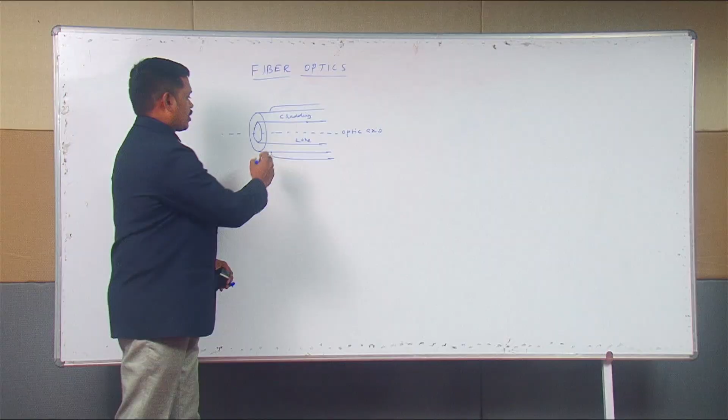The internal portion is called core, then external is cladding, and this is optic axis. Along with this, we have one more layer which is called polyurethane jacket, which can protect the fiber from any damage. Normally, the core material having high refractive index and the cladding material is having low refractive index.

If you send any external light through the fiber, it should obey the total internal reflection condition. So we should understand what is total internal reflection.

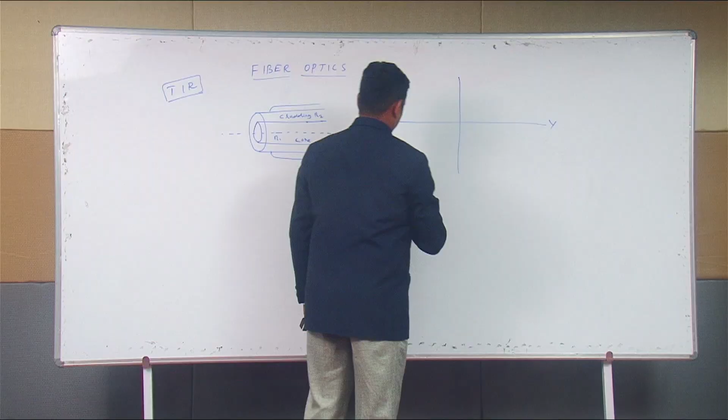For that, if you take two mediums, one is denser medium, another one is rarer medium. Assume this is the plane, the ray of light is going to travel from denser medium to rarer medium. It can undergo refraction in this condition, and this is the normal, and the angle between the incident ray and normal is angle of incident.

Most people have a misconception. They choose the angle between the incident ray and the plane as incident angle. This is a misconception, since this portion is called glancing angle.

Now if you increase the angle of incident, the angle of refraction also increases. Here also we have to measure the angle of refraction from normal to refracted ray. So if I increase the angle of incident, angle of refraction also gradually increases.

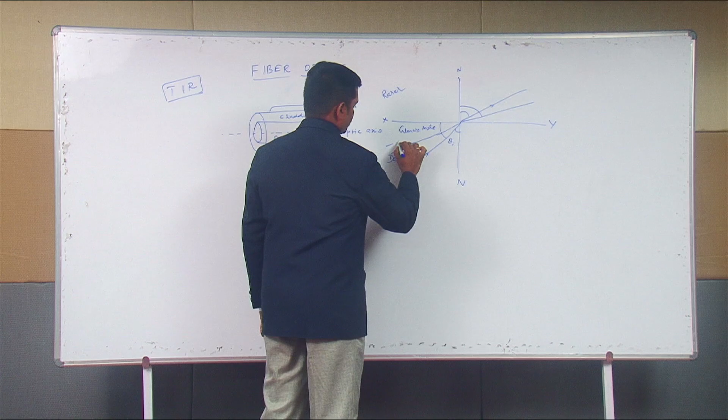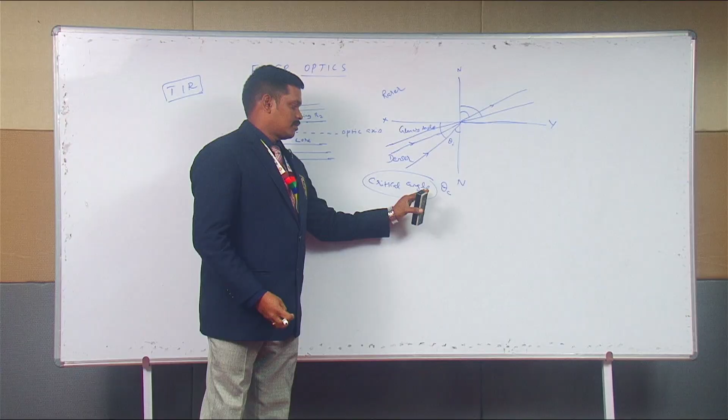Furtherly, if I increase the angle of incident, the angle of refraction becomes 90 degree. That angle is called critical angle. The critical angle plays very important role in the total internal reflection. The exact definition for critical angle is, for a particular angle of incident, angle of refraction is 90 degree. That angle is called critical angle.

Above the critical angle, if the angle of incident is furtherly increased, it gets reflected within the same medium itself, that is denser medium itself. That phenomena is called total internal reflection. So for all fibers, total internal reflection plays very important role in order to enhance the efficiency of output.

In this concern, we can derive the expression for critical angle. So before deriving about this, we can have a recap on laws of reflection as well as laws of refraction.

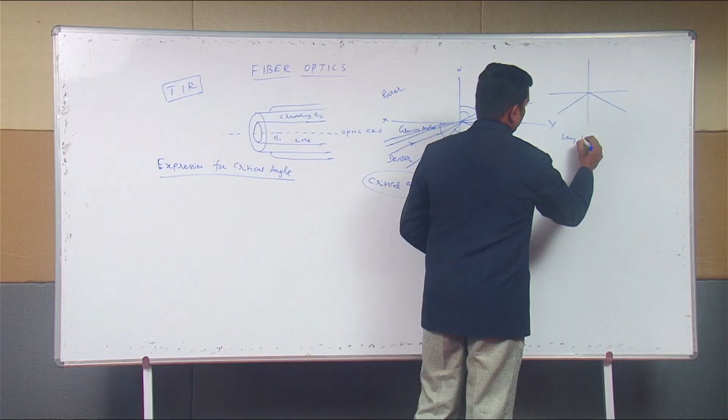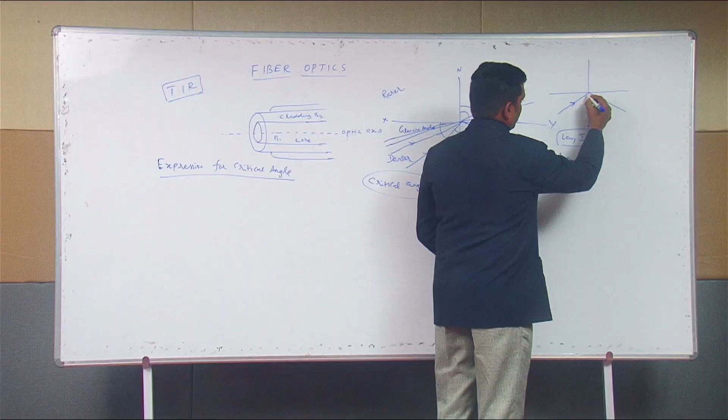For laws of reflection, if you assume the ray of light transfers from one medium, if it gets reflected like this, here law 1 is: the incident ray, reflected ray, and normal, all lie in same plane. The same way, law 2 is the angle of incident is equal to angle of reflection.

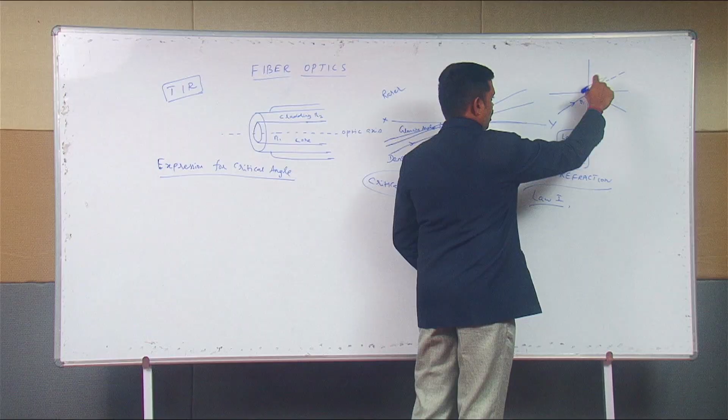Similarly, we can discuss about laws of refraction. Again you can assume the ray of light is going to travel from one medium to another medium, if it is refracted like this, again law 1 is similar to laws of reflection. The incident ray, refracted ray, normal all lie in same plane, whereas law 2 is very important, which is applicable in total internal reflection also. That law is called Snell's law.

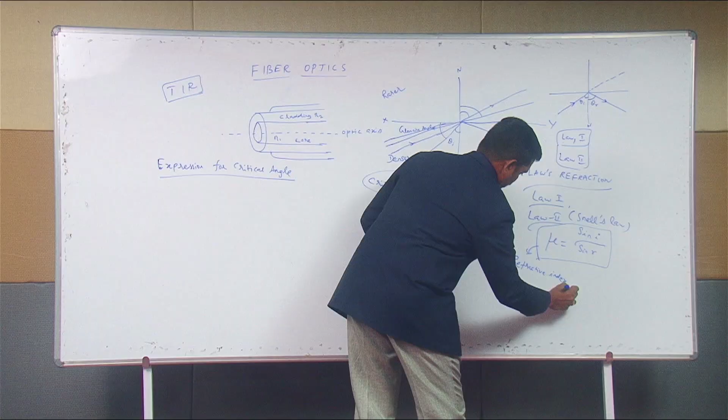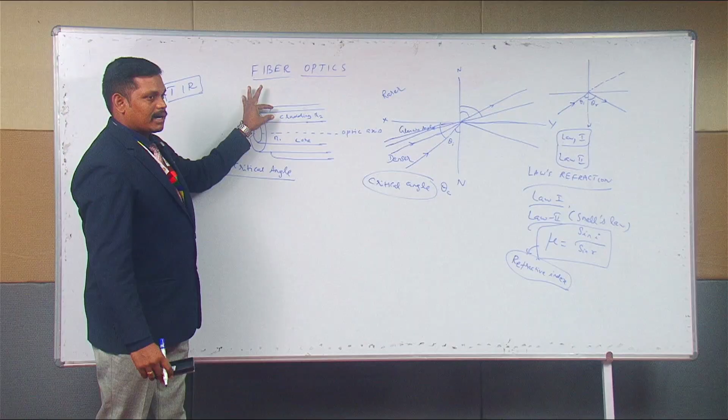According to Snell's law, the ratio of sine of incident angle to sine of refracted angle is constant, and this is called refractive index. That refractive index plays very important role in fiber optics. As we mentioned earlier, the refractive index of core is high and refractive index of cladding is low. Then only it can obey total internal reflection condition.

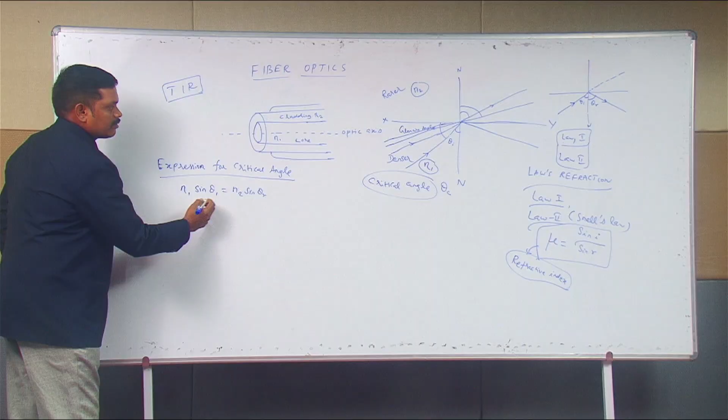Now coming to the expression for critical angle. So according to Snell's law, the refractive index of denser medium is N1, the refractive index of rarer medium is N2, and you can write the equation as N1 sin theta I is equal to N2 sin theta R. From this, sin theta I is equal to N2 by N1 sin theta R.

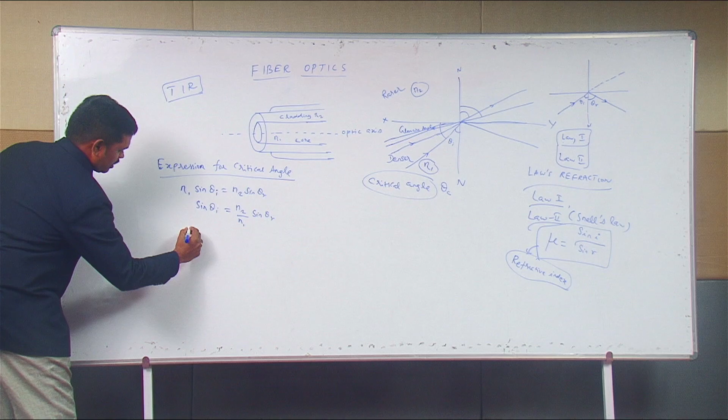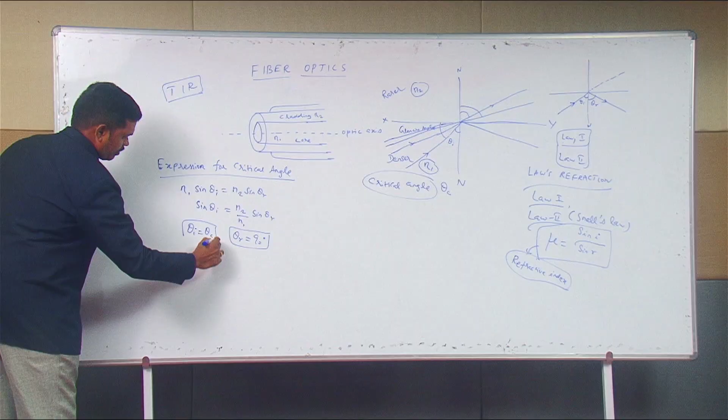As we discussed earlier, for critical angle condition, refraction must be 90 degree. So for 90 degree, it can undergo total internal reflection. So theta I is equal to theta C. In that concern, sin theta C is equal to N2 by N1 sin 90 degree, and we know sin 90 is 1. Then we can have sin theta C is equal to N2 by N1. Theta C is equal to sin inverse N2 by N1. So this is the expression for critical angle.

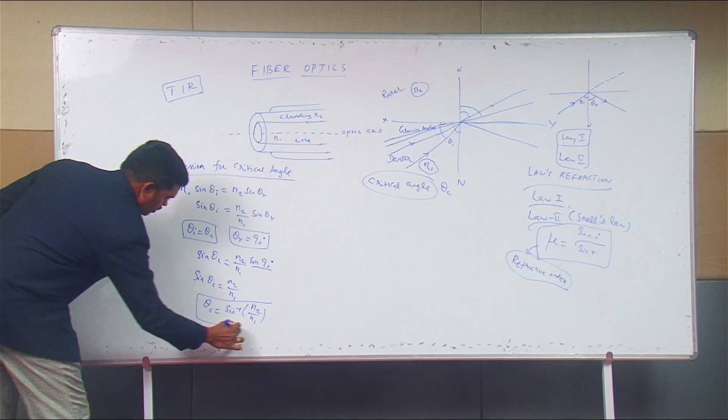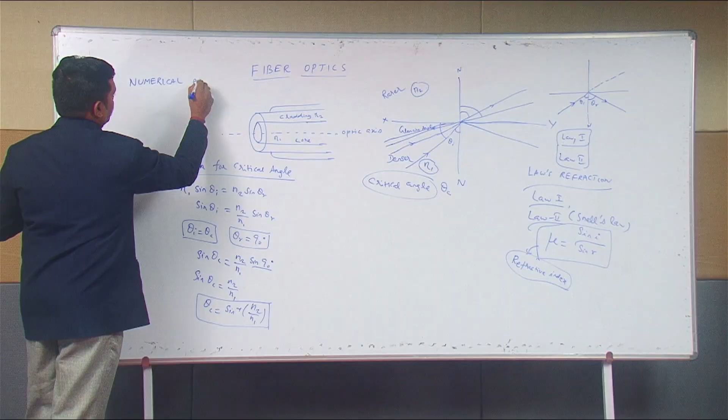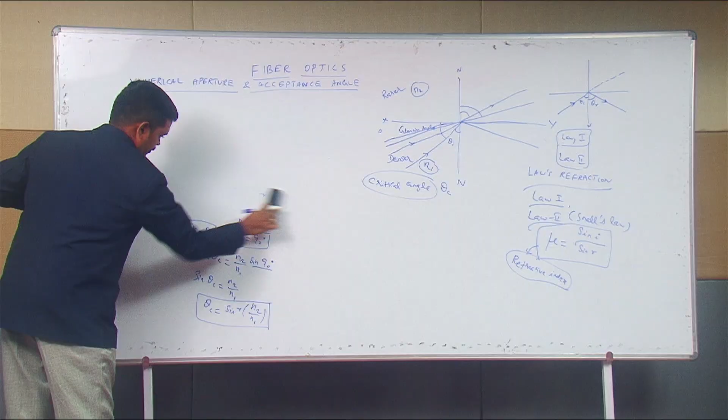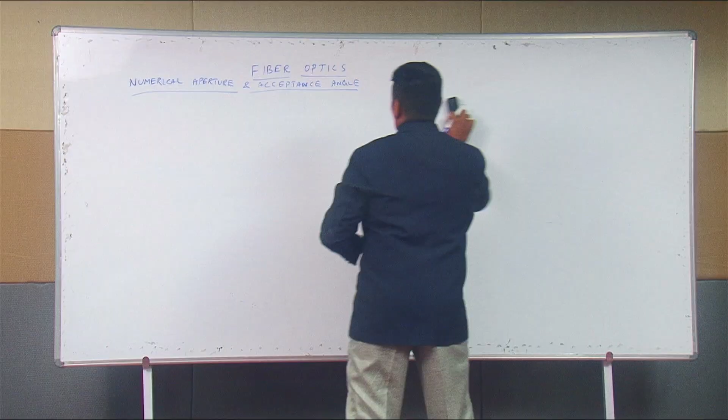And based on this, we can derive the expression for numerical aperture and acceptance angle. In other words, we can say this is the principle of light propagation through fiber. Or we can say principle of light propagation through fiber.

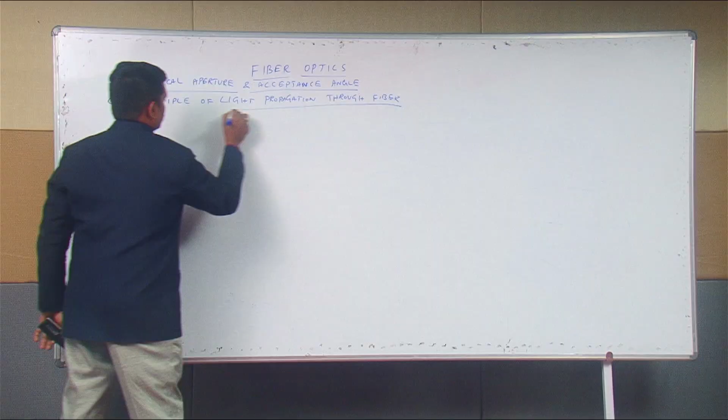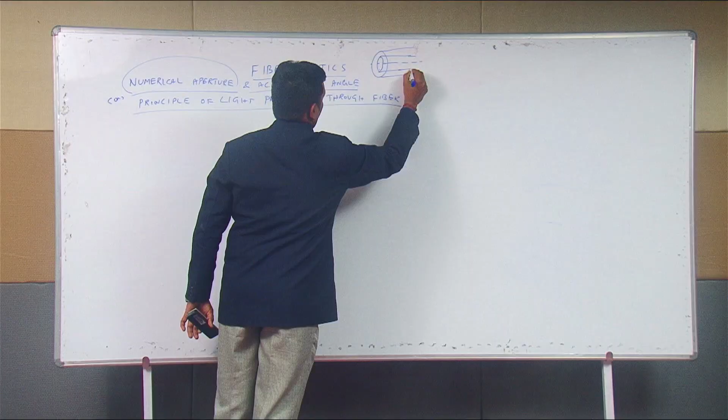So first we should know what is numerical aperture. See, if you take any fiber, the opening portion is called numerical aperture. This portion is called numerical aperture, in which the ray of light can incident so that it can undergo total internal reflection. And acceptance angle is the light entering at one end of the fiber.

If it enters at a particular angle, then only it can undergo total internal reflection. That is called acceptance angle. So in that concern, we have to derive expression for both the numerical aperture and acceptance angle.

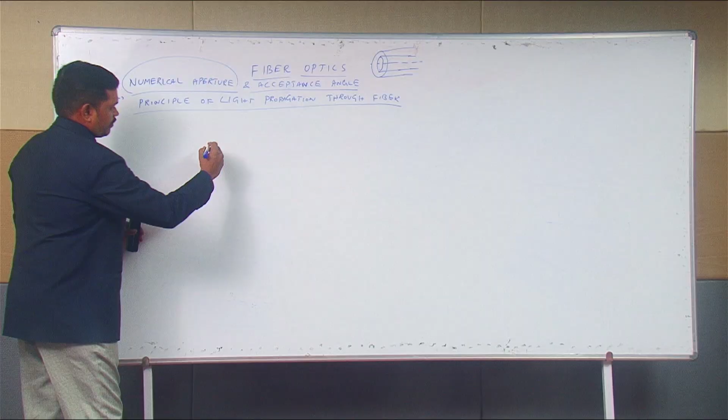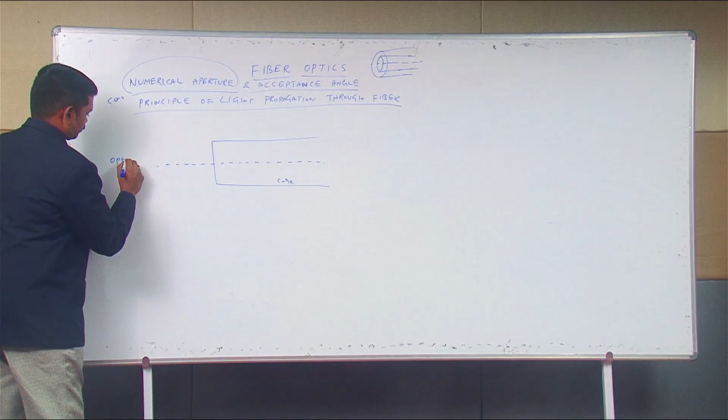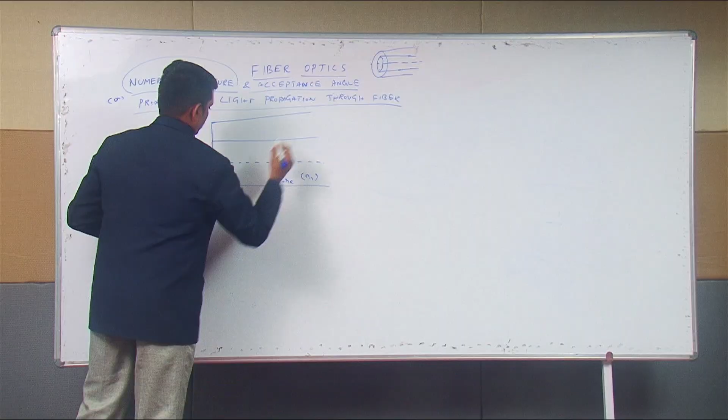For that, we can assume again a fiber. The fiber, this is core portion as we discussed earlier, and this is optic axis, and the core having refractive index N1, and this is cladding. It has refractive index N2.

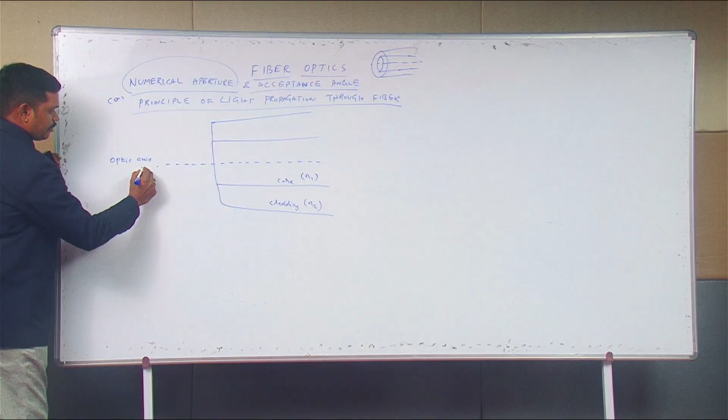Assume that a ray of light is going to incident on one end of the fiber, say that point is O, and the refractive index of surrounding or air is n naught, we can assume.

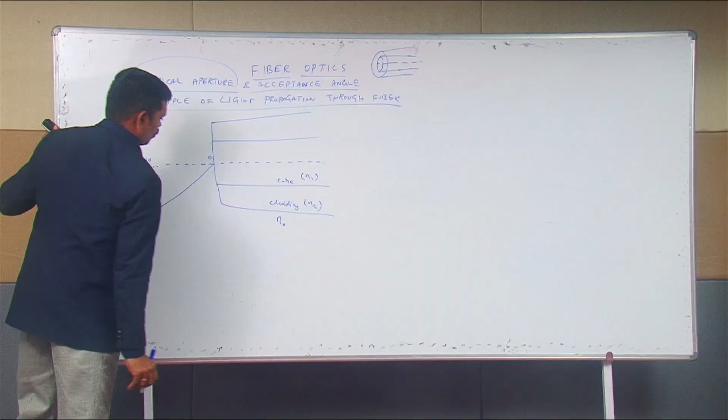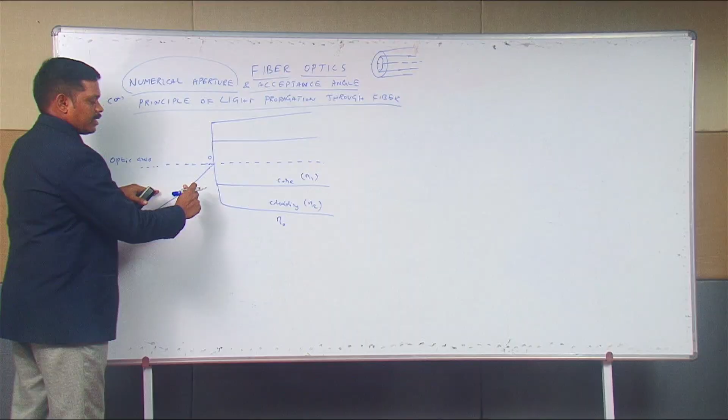So, AO is the incident ray. Then by obeying the total internal reflection condition, the ray can be refracted and it meets point B, in which the angle is 90 degrees, and after that it undergoes total internal reflection condition.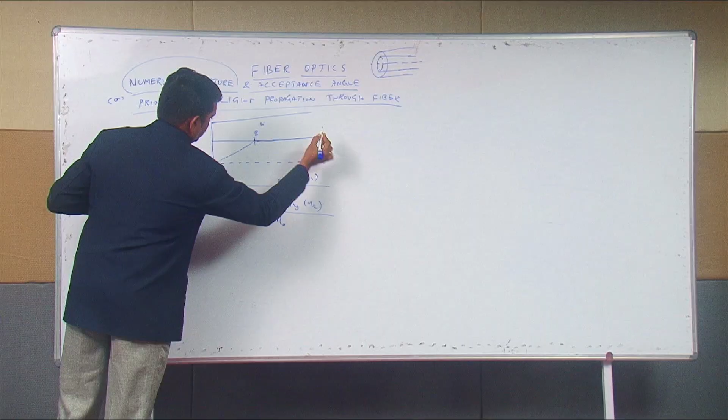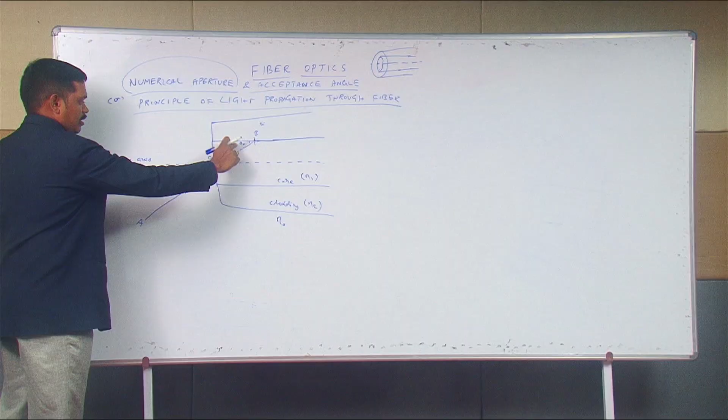And this is the angle of refraction. As we know, alternate angles are equal. In that concern, you can mention this is the refracted angle, and this is also the refracted angle.

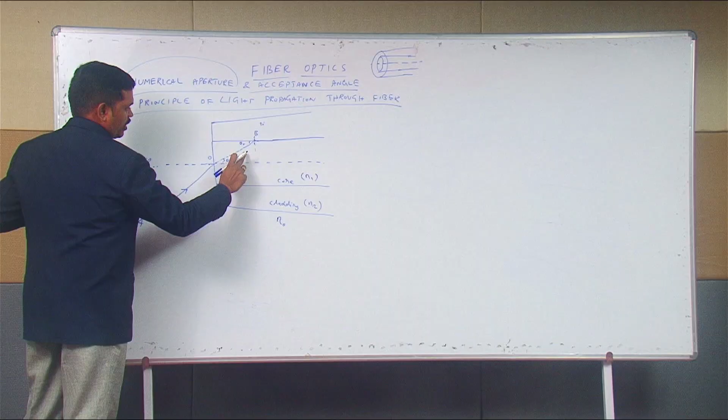In the same way, AO is the incident ray, OB is the refracted ray, but for point B, OB is the incident ray in which the angle of incidence is 90 degrees minus theta R. So, at point B, 90 degrees minus theta is the angle of incidence.

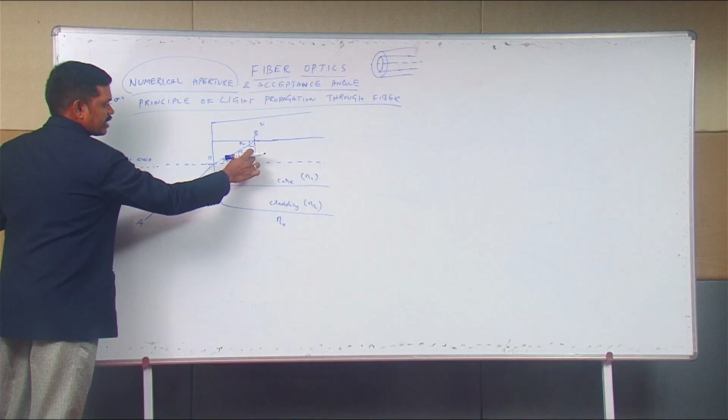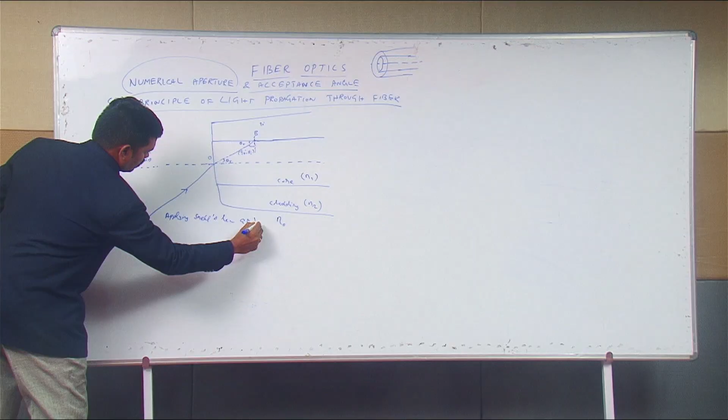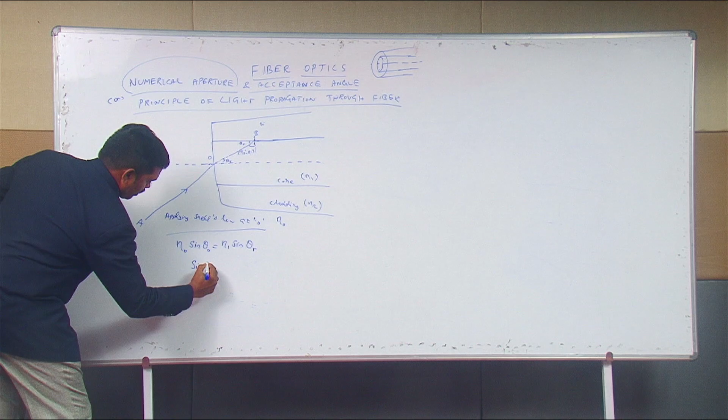Now we can apply Snell's law at O. So applying Snell's law at O, we can write N naught sin theta naught is equal to N1 sin theta R. From this, sin theta O is equal to N1 sin theta R by N naught.

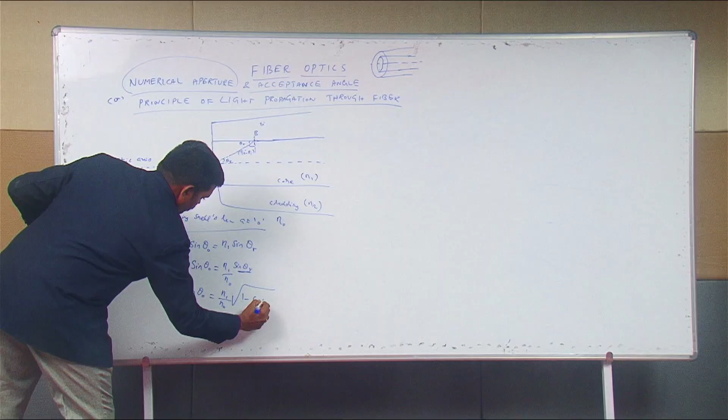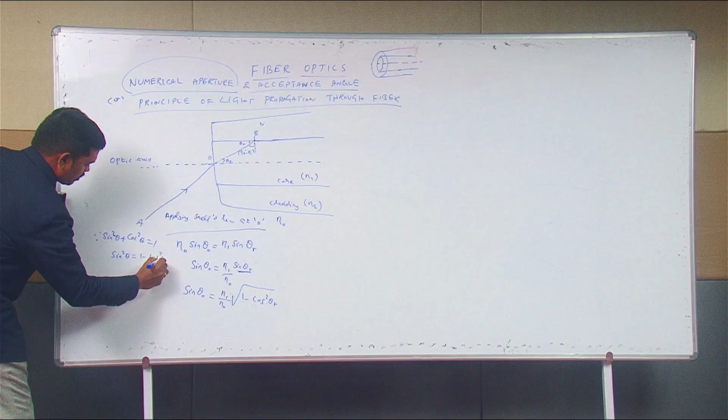You can assume it as O or not, that is up to us. And here, instead of sin theta R, you can write sin theta naught is equal to N1 by N naught, root of 1 minus cos square theta R. Since we know sin square theta plus cos square theta is equal to 1, sin square theta is equal to 1 minus cos square theta. If you need to find sin theta, it is root of 1 minus cos square theta.

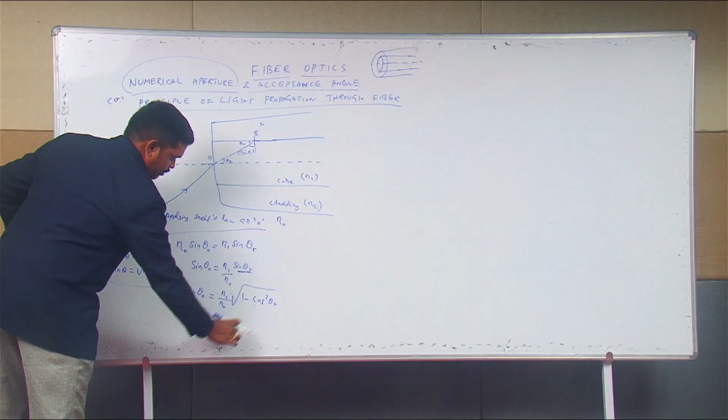So in that concern, instead of sin theta R, we substitute 1 minus cos square theta R. We can assume this is equation 1. In the same way, we can apply Snell's law at point B.

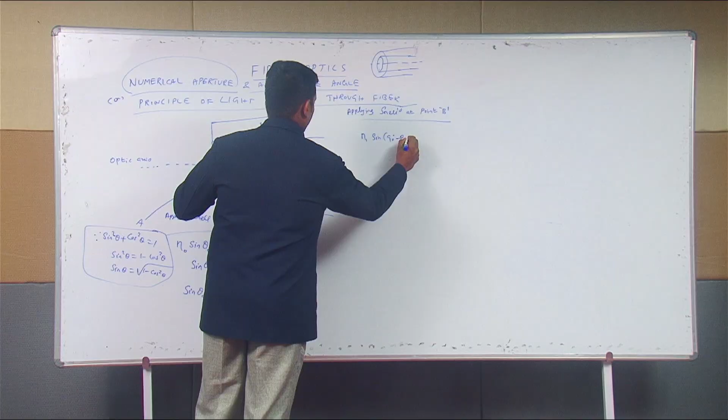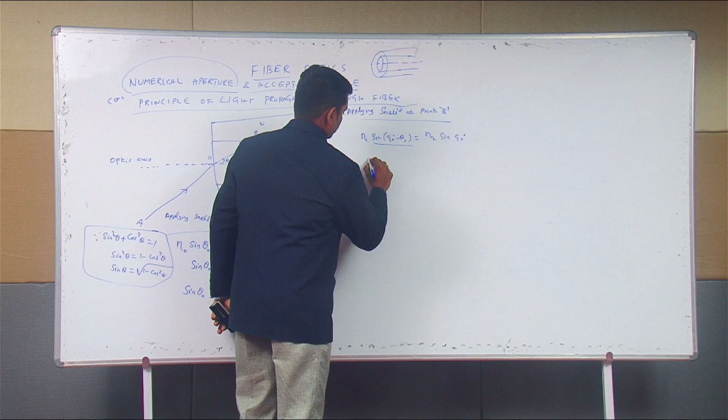And as mentioned earlier, here this is the incident angle. So N1 sin(90 minus theta I) is equal to N2 sin 90 degrees. Since at B the angle is 90 degrees, and we know sin(90 minus theta) is cos, so N1 cos theta I is equal to N2 sin 90.

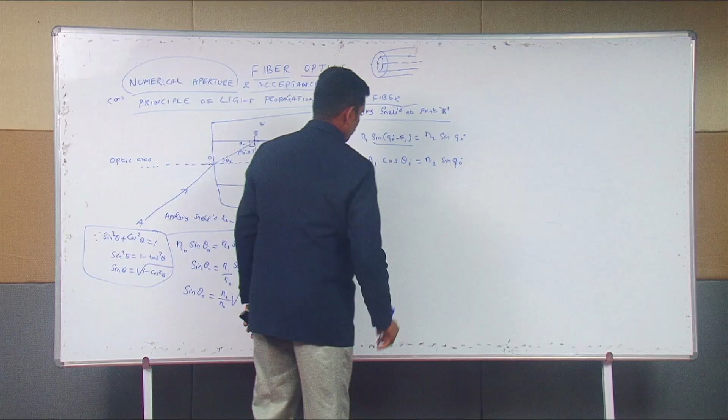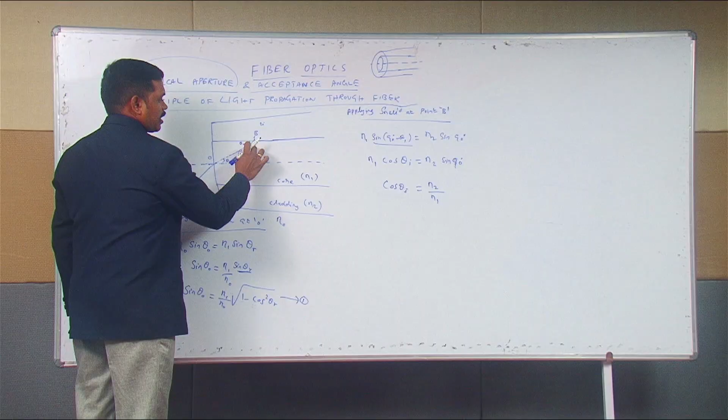From this, cos theta I is equal to N2 by N1, and here this is theta I and this is theta R. Alternate angles are equal, so you can represent this as theta R also.

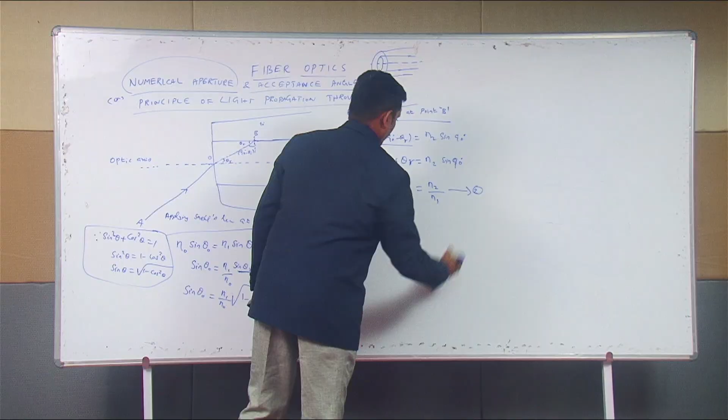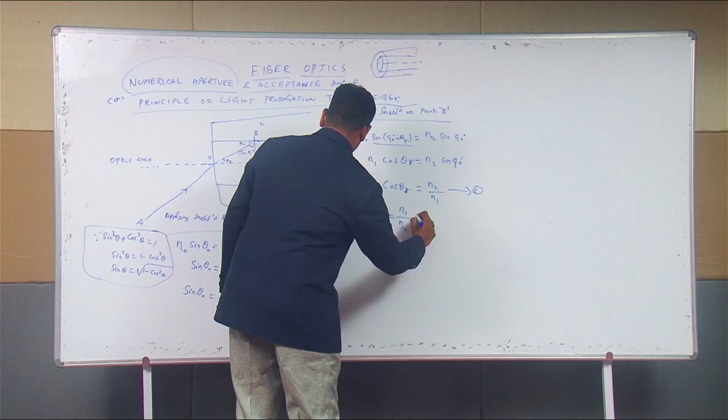This is equation 2. Substituting the value of 2 in 1, we have sin theta naught is equal to N1 by N naught. Instead of cos square theta R, we substitute N2 square by N1 square.

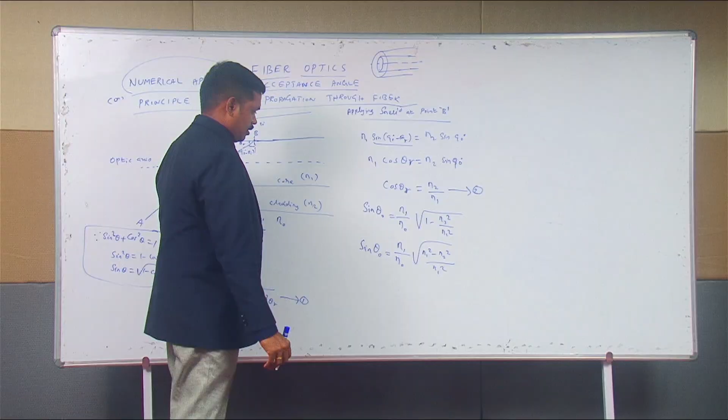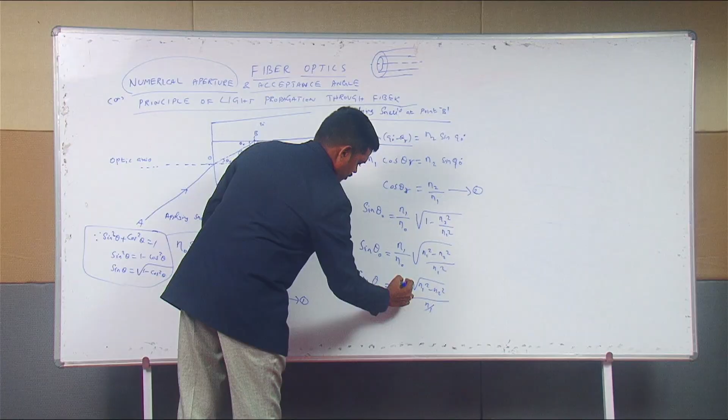So simplifying this, sin theta naught is equal to N1 by N naught, root of N1 square minus N2 square by N1 square. Further simplifying, sin theta naught is equal to N1 by N naught, you can take the root, so you can write this as N1 square, N2 square by N1, and by cancelling this, we have sin theta naught is equal to root of N1 square N2 square by N naught.

From this, theta naught is nothing but the acceptance angle. So theta naught is equal to sin inverse root of N1 square N2 square by N naught. Here N naught is the refractive index of air. For air medium, N naught value is 1. So in that concern, theta naught is equal to sin inverse root of N1 square N2 square.

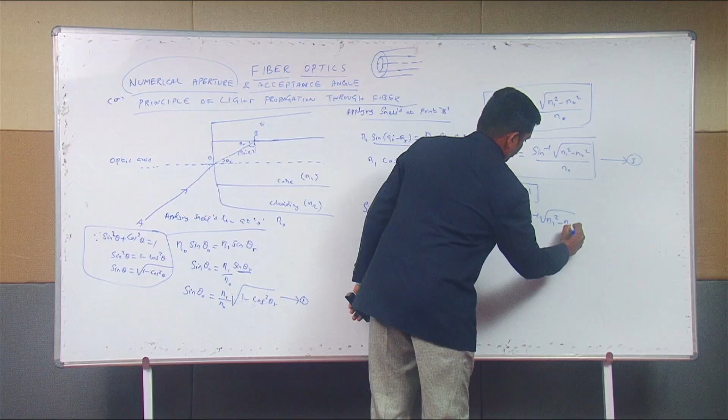So this is the expression for acceptance angle.

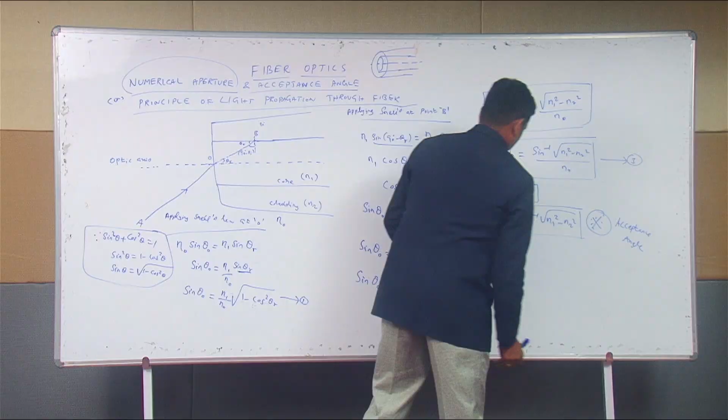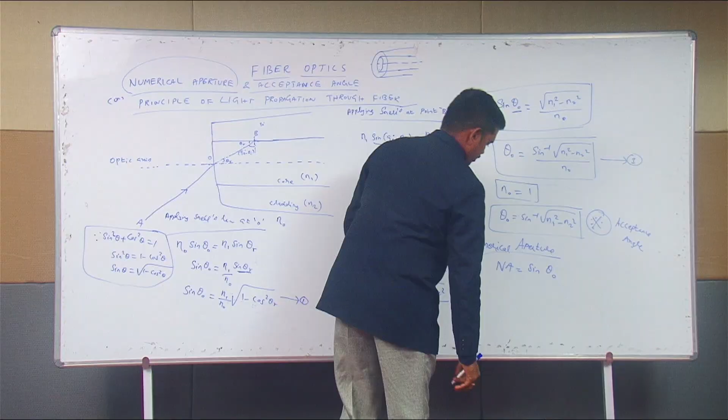Then followed by, we can discuss numerical aperture. Numerical aperture is nothing but the sine of the acceptance angle. In that concern, we can have numerical aperture equal to N1 square N2 square.

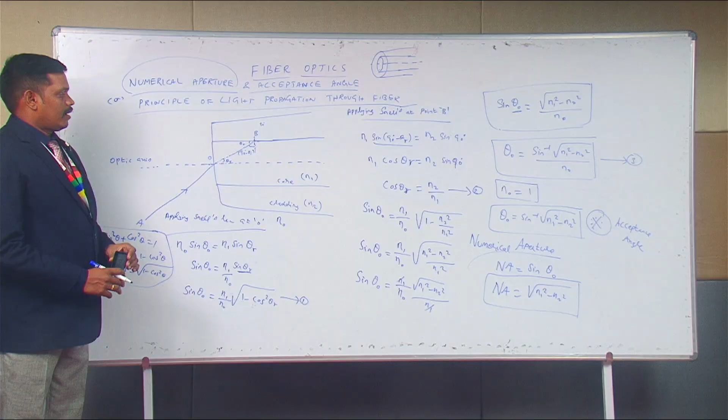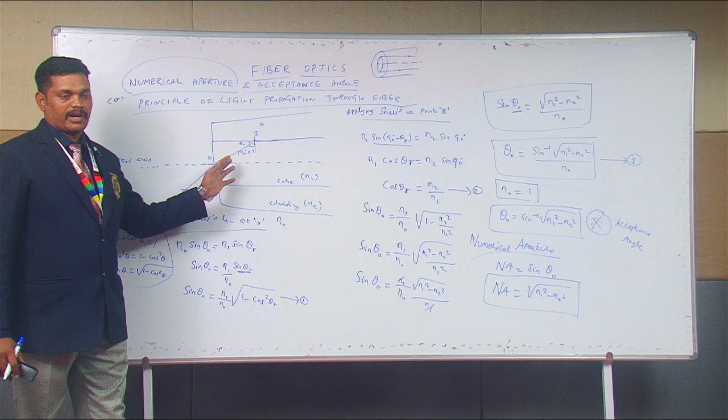So these two are very important to understand any fiber's principle, and based on this we can discuss the losses associated with fibers. So if you are using any fiber, definitely there will be losses, and there are three types of losses.

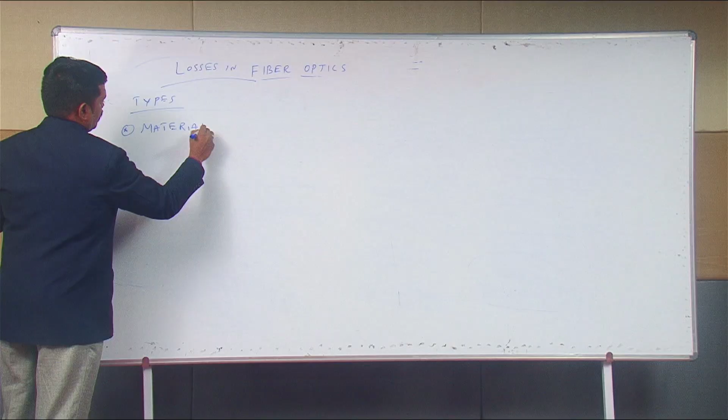So, losses in fibers, the types are material absorption loss, scattering loss, and bending loss.

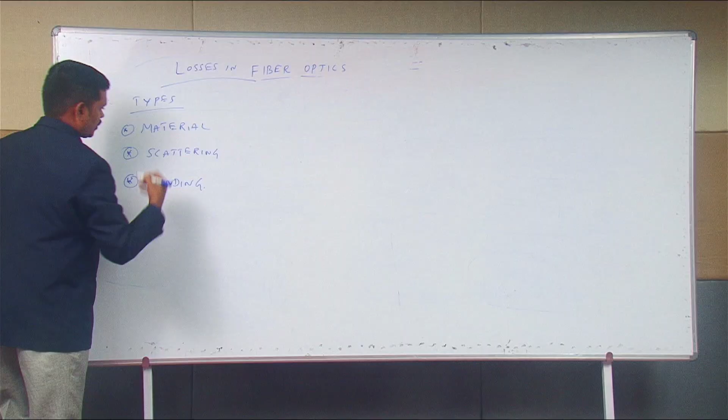The material absorption loss is further classified into three categories based on the material used for manufacturing of fibers: extrinsic absorption, intrinsic absorption, and absorption by atomic defects.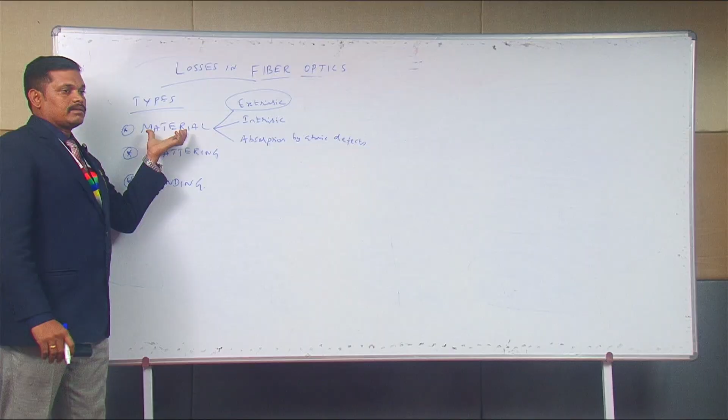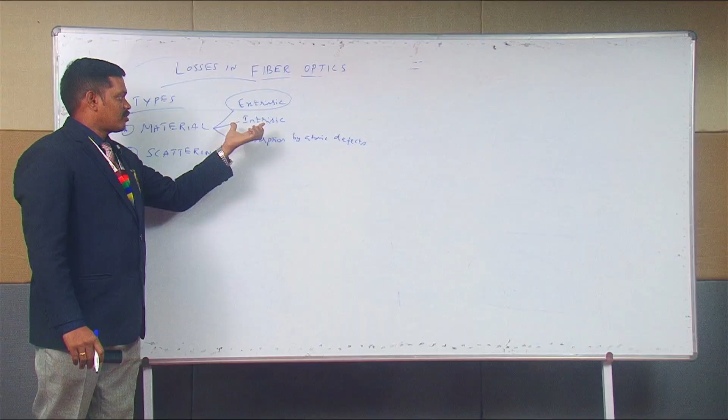So while using the fibers, there is a chance of absorption from extrinsic material, and if it is absorbed, there will be a loss of output. Intrinsic absorption loss takes place during manufacturing itself, or while using, because of continuous usage there is also a chance for intrinsic loss. Absorption by atomic defects also takes place during manufacturing if there are any defects during manufacturing.

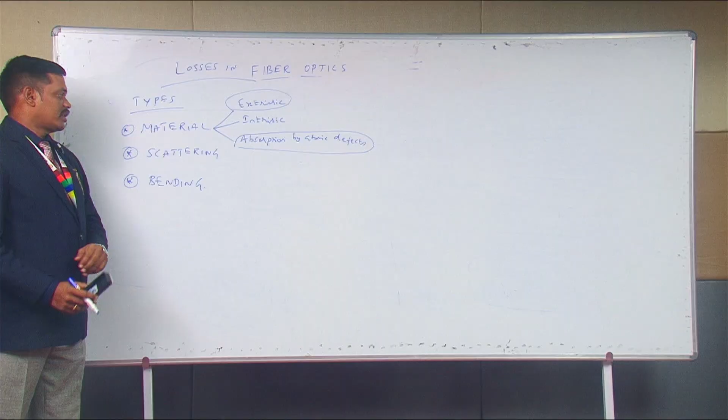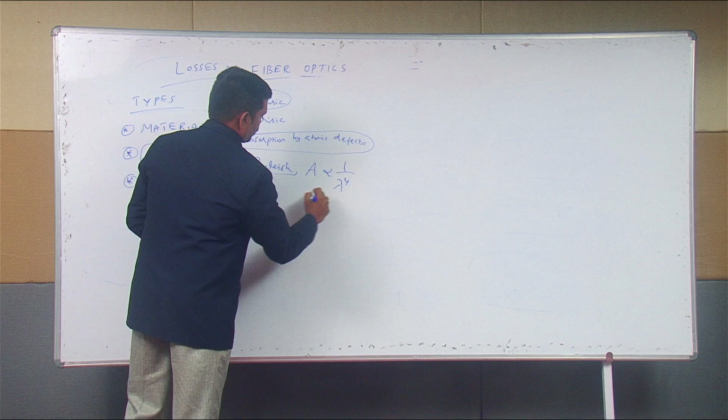The scattering loss takes place because of continuous usage, and it obeys the Rayleigh law. Normally, Rayleigh law states that the amount of scattering is inversely proportional to the fourth power of wavelength. So that is the second type of loss, and the third one is bending loss.

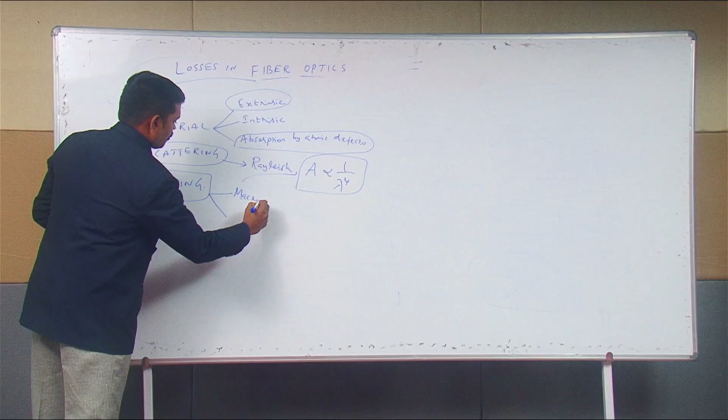It is further classified into two categories, such as macroscopic bending and microscopic bending loss.

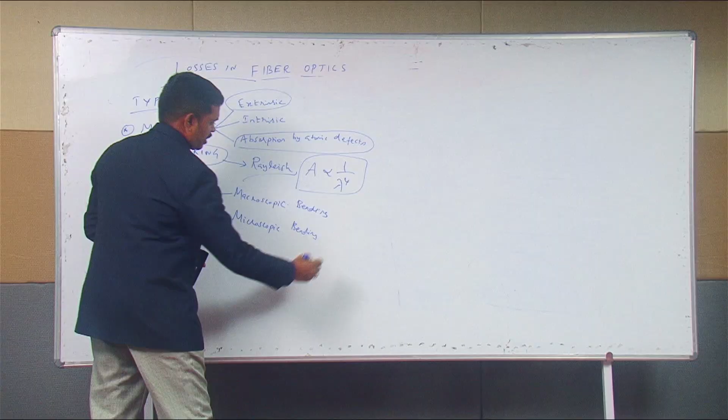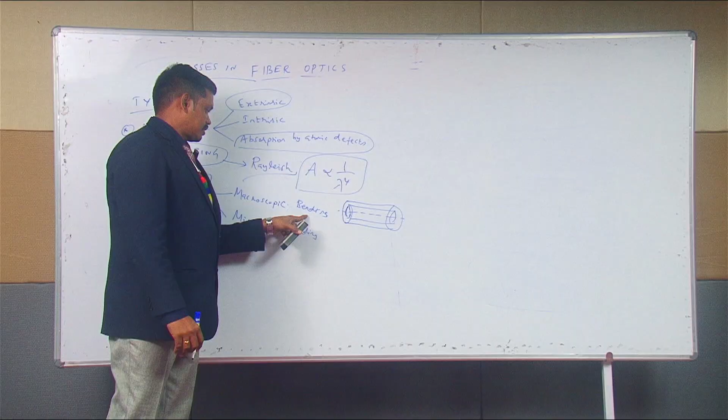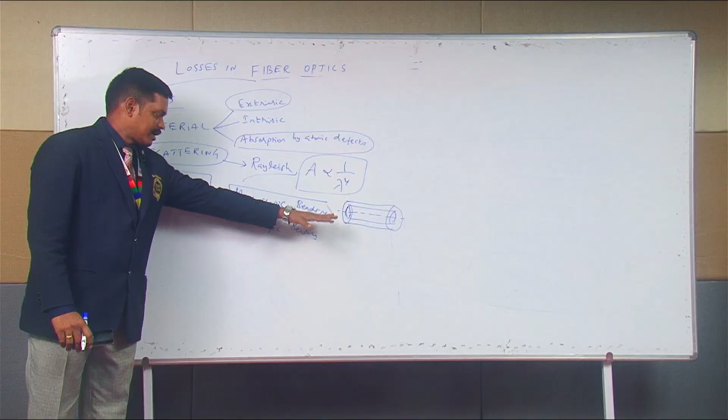If you take any fiber, in which the radius of curvature of the bending is greater than the diameter of the fiber, macroscopic bending takes place. While bending the fiber, there will be some changes in the diameter. So, the radius of curvature being greater than the diameter of the fiber causes macroscopic bending.

Whereas, when the radius of curvature is lesser than the diameter of the fiber, microscopic bending takes place.

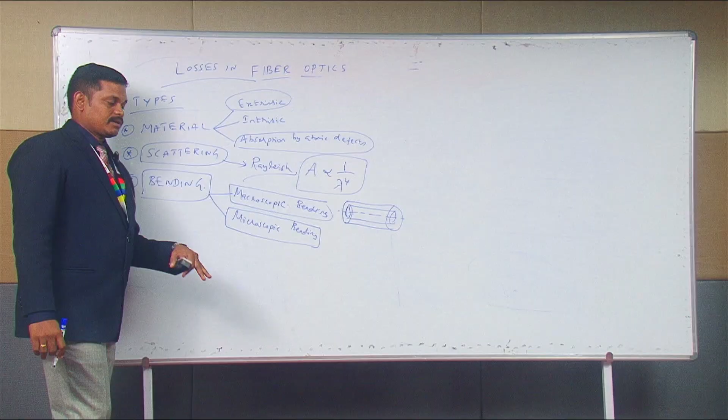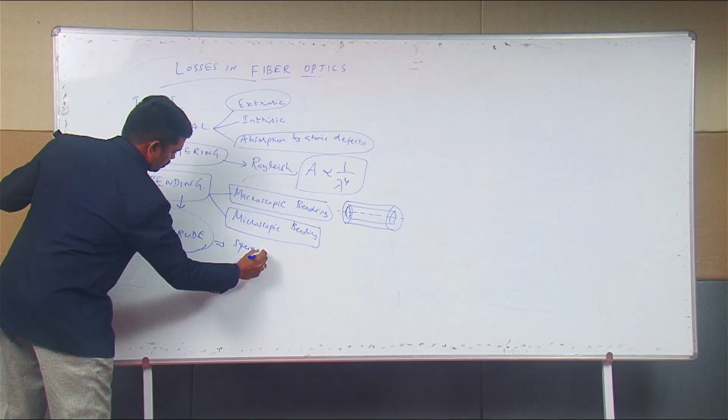In order to overcome these limitations or to avoid this loss, we have to extrude the material. So, the extruding process is simply squeezing out. By squeezing out, we can minimize the losses that occur due to bending loss.